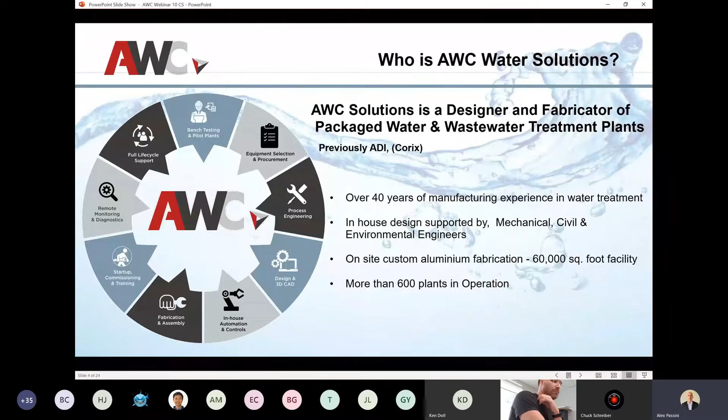For those of you that are new with us or that don't know who we are, AWC Water Solutions, we are a water treatment company. We design and manufacture or supply water treatment plants worldwide. We've been around now for 40 years. We have more than 600 plants in operation, and we are based in Vancouver, British Columbia, Canada, or Langley, just east of Vancouver. This is our shop.

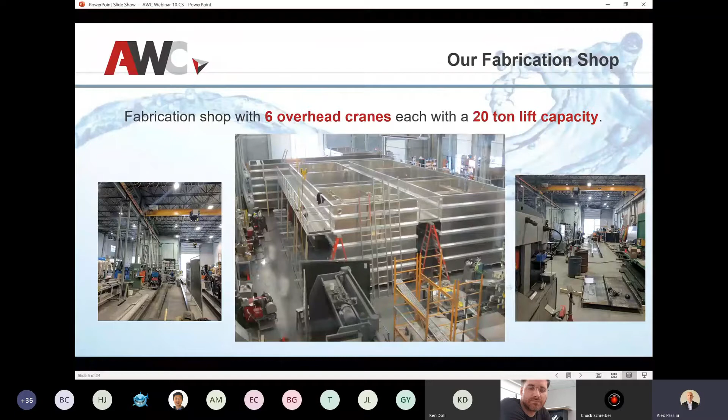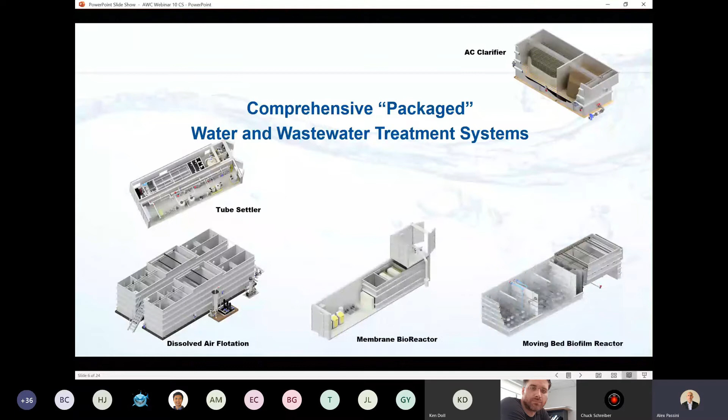This is what we do. It's really fun, we get to manufacture everything in-house and test everything before it ships. And with that, one more slide here - we divide everything into potable, wastewater, and skid-mounted plants. So this is kind of the technology that we go after.

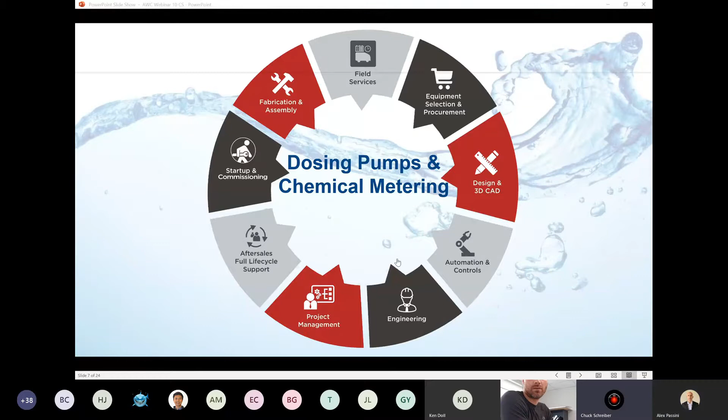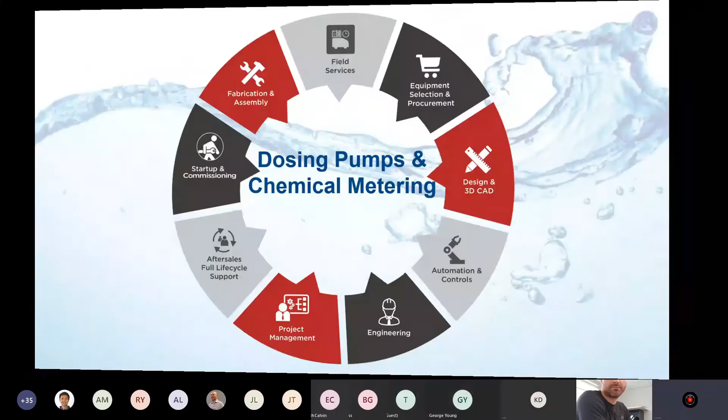Just give me a second while I get this webinar up and going here, guys. Let me know if you can see that now. Yes, we can. Okay, you bet.

So good morning, thank you everybody for joining. There's nothing more exciting than talking about metering pumps. It's a pretty bland subject, I got to admit. Out of all the lunch and learns that I perform and all the conversations I have with operators and engineers and generally end users, it's kind of a tough slog to get through.

So I'm going to blast through this really quick. I'm not going to go deep into theory or into things that I feel are kind of just fillers. We're going to talk about this at a macro level. I'm going to show you all the more common types of metering pumps that are out there. I'm going to comment on what my experience has been on some of the general features and the benefits of those features in those applications. I'm going to talk about the drawbacks, and we're going to talk very candidly about why we wouldn't use one in some applications and why we would use another in others.

More importantly, I'm going to focus a little bit on supporting components, because metering pumps by themselves won't meter properly without the right components - and yes, I'm going to say that out loud. Right now, if some of you are already distributors of other metering pump manufacturers, we can argue that offline, but yeah, we're going to get into that. And then I'm going to identify some of the North American common manufacturers out there in the marketplace.

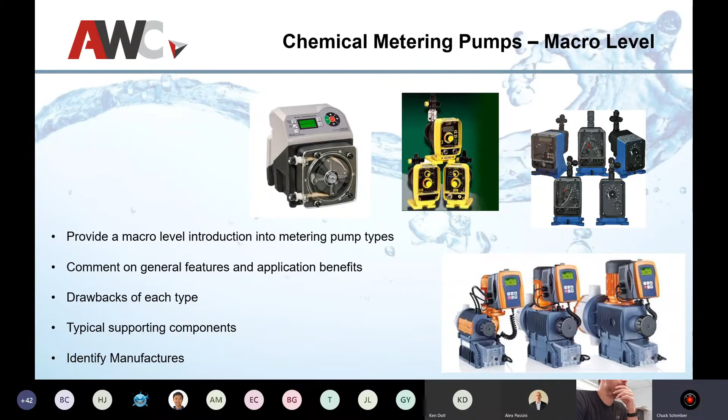Getting right into it, most metering pumps are positive displacement. And obviously, being positive displacement gives us the ability to know accurately how much chemical or product you're pumping in per stroke. That's obviously important when we're dosing hypochlorite, adding ammonia, all sorts of chemicals that we do in the water and wastewater industry.

One of the more common ones out there is a diaphragm pump, which is just a simple diaphragm actuated by some form of mechanical shaft, moving back and forth with a known displacement. The most common one in the industry is the solenoid operated diaphragm pump, which basically energizes and de-energizes a solenoid based on either manual or automatic control.

These guys are low cost. You'll find them in multiple applications - I've seen them in polymer, hypo, ammonia, peracetic acid, all sorts of configurations. They're easy to use, they basically have one big fat dial.

So obviously you turn it one way and you get more, and turn it the other, ranging from half a liter an hour up to 75 liters an hour. So we cover quite a huge breadth of capacity, and pressure is really not an issue for them on the high side. We can also get them in multiple diaphragm heads, meaning that if we have a flow and pressure issue, we can provide multiple diaphragms to increase the capacities.

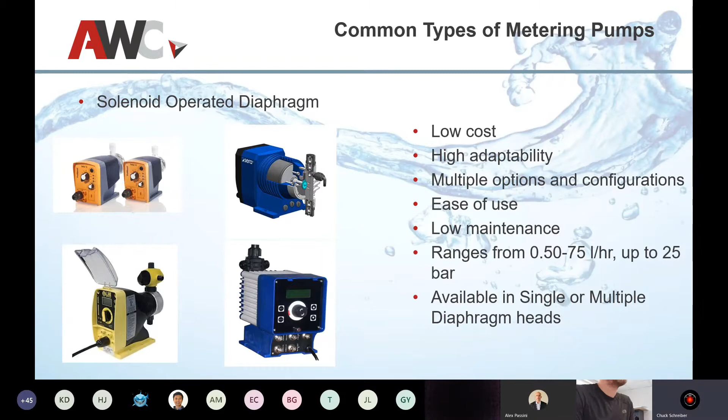In the diaphragm range, there's also something known as a stepper motor. So now we go away from the solenoid and we actually move a microprocessor controlled motor, where we can control the speed and the position of that diaphragm more accurately. The advantage of a stepper motor is we get a longer life than a solenoid. We can also control the suction stroke speed and the discharge stroke speed. So instead of just hammering away, we're getting a slow discharge like a needle or a syringe action, and a fast suction. We can also control some of the pulsation, and obviously the ranges are really the same as the solenoid, around half a gallon to 75 gallons an hour at about 25 bar.

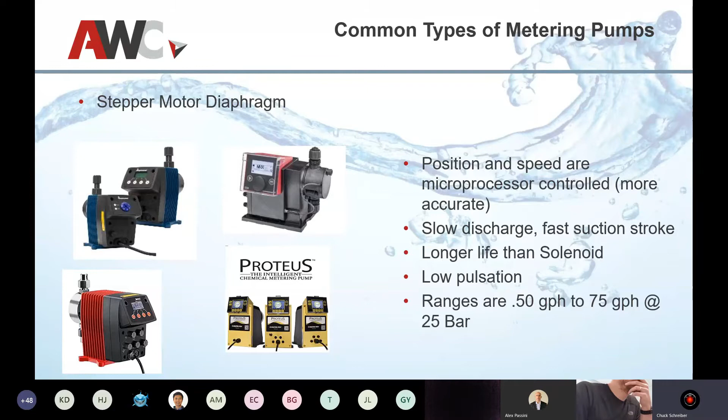Going into the bigger flow rates, typically you'll see these guys on, let's say, on-site generation for hypo, where we're looking at really higher flow rates, maybe higher injection pressures. You're going to see a mechanically actuated diaphragm pump. So we go away from a stepper motor, we don't have a solenoid, and what we really have is a gearbox and a gear reducer in here, and it actually mechanically actuates the diaphragm back and forth.

The reason why we go to this is we can actually provide better gear ratio and tighter control. And these guys will, in terms of maintenance, last considerably longer than you would find out of a solenoid operated diaphragm - maybe slightly longer than a stepper, obviously because we have less load on the motor. Flow rates are up to 10,000 gallons per hour and more. Obviously, you can see some pump companies can go up to 56,000 psi. They cost more, but it's because of the additional components required, being the gearbox. We can typically get a higher viscosity ratings, 300,000 SSU.

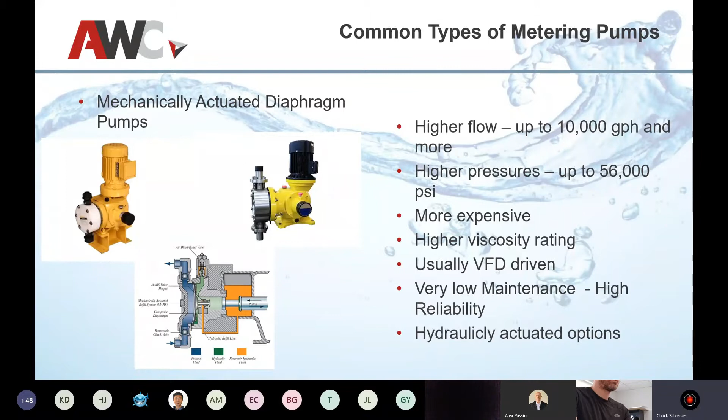And what's really more common in the water and wastewater treatment is the hydraulically actuated version of this. So why that's important is we actually use a plunger that imparts displacement to a hydraulic fluid, which actuates the diaphragm. And why that's important is now we have even pressure on the backside of the diaphragm through that fluid pressure, and those diaphragm lives are very long. Obviously, pressure is a component of that, but I've seen hydraulically actuated diaphragm pumps in operation for 10, 15 years that they haven't done a diaphragm change.

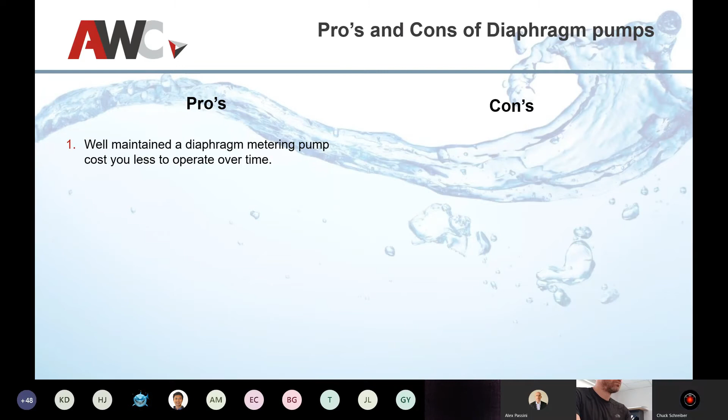So some of the pros - I just want to stop about the diaphragm pumps because there's always a big debate in the industry between two major technologies, that being diaphragm pumps and peristaltic. So I want to talk about the pros and cons of each after I go through them. A well-maintained diaphragm metering pump will cost you less to operate over time if it's well-maintained.

They actually are more energy efficient because we don't need full power all the time - it's only on the discharge stroke. And higher pressures, they have no issues with higher pressures. There's less danger of leakage, and that's comparative to, let's say, a Bellows pump, which I'll talk about later, or a Peristaltic Pump, which is coming up on the next slide.

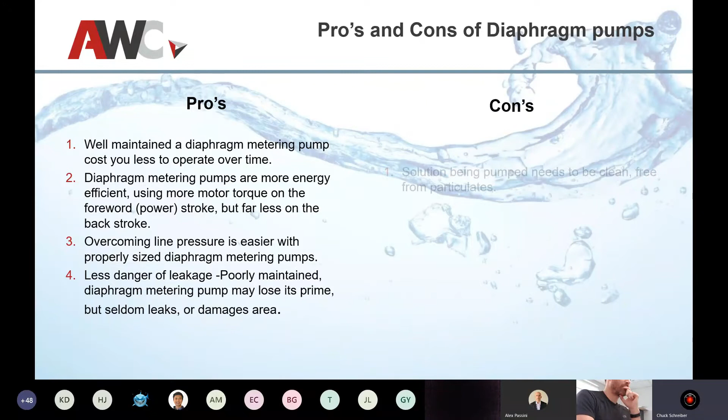The biggest disadvantage is that we need this fluid to be clean. The real reason is because a solenoid pump, a stepper motor pump, a mechanically actuated diaphragm pump uses ball checks for the suction and discharge, and those can foul very easily. That's why it's rare to see them in polymer applications or even soda ash applications or aqueous, because it has a tendency to build up on the seats and balls.

They can't prime themselves when there's a lot of pressure. So a lot of these pumps to prime will have some ancillary way of dumping the discharge line pressure before it can prime.

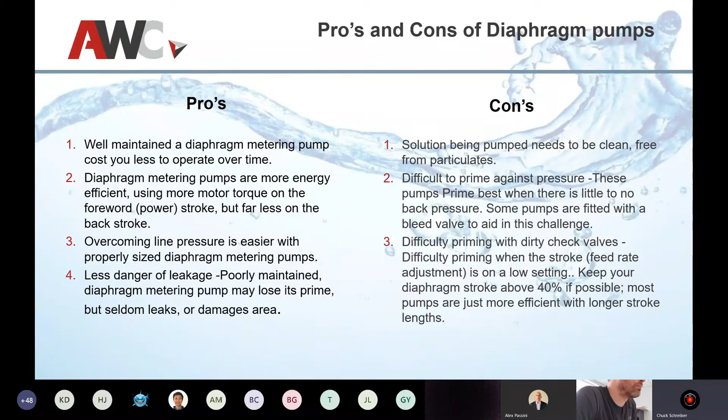The next type, probably very well known to most of this group, is the peristaltic pump. They can come at some of the lowest initial costs. Really simple to operate, really quite easy to maintain. Most manufacturers have offered a way to change tubing very simply. The view windows provide a quick check, so operators like them because they can have a quick look and see that pump's turning and know it's flowing, no weird noises coming in. Initially designed and fantastic for slurries. A lot of the mining guys, aggregate guys, use these for pumping slurries all day long.

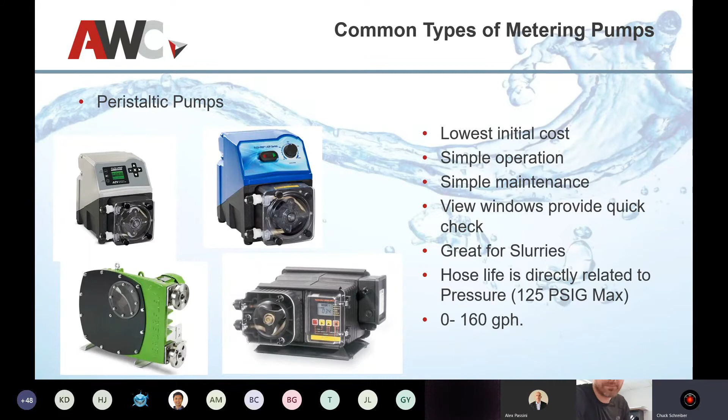A lot of the maintenance is around the hose, and that hose life is directly related to the pressure they're operating against. Full range is roughly 0 to 160 gallons per hour on the peristaltic version. There are what they call hose pumps, just like this Verderflex over here, where they actually use lubricant inside, and those flow rates can go considerably higher, but rarely are they used in a water wastewater application.

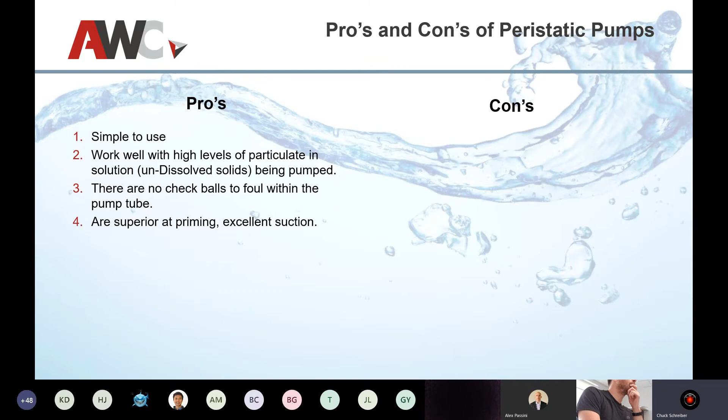Again, looking at the pros, they're simple to use. They work well with solids. There's no check balls, so we can handle a lot of slurries, solutions, and suspensions. Really good at priming, really good.

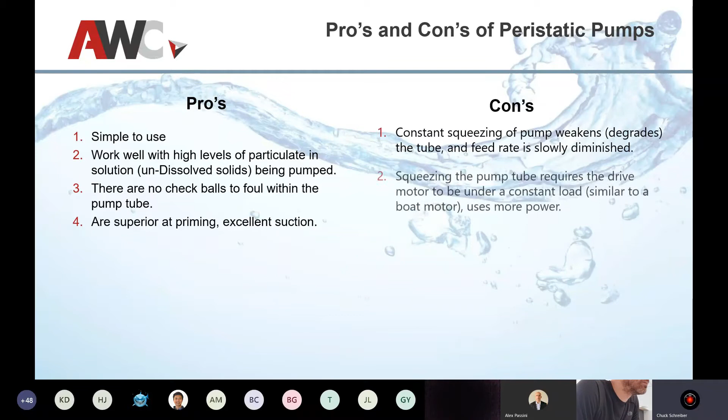That squeezing of the tube, though, weakens that tube eventually, and your feed rate will change. So most operators and people who've commissioned these units know that over time you're always going to be turning the adjustment knob up. So the motor's under constant load.

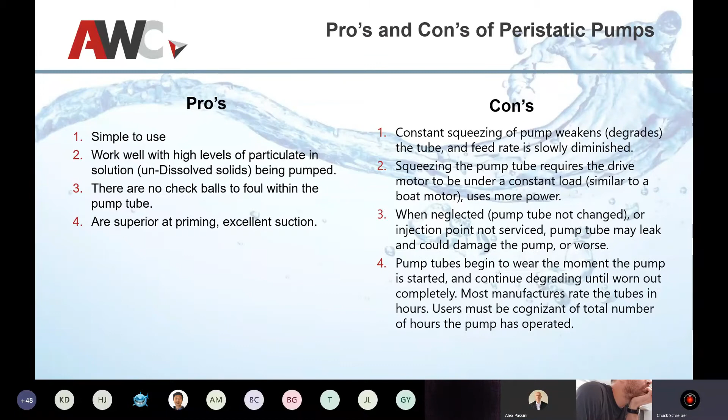And I will tell you, if these pumps aren't changed out in a proactive or preventative maintenance way, they leak, and when they leak, it's not fun to change. So you've got to be up on the maintenance. And that tube, the minute that roller or shoe starts turning against it, it starts wearing it. So you always want to keep an eye on the number of hours that pump's been actually in operation.

Another really common type out there is the progressive cavity metering pump. Some people don't even know you can use a progressive cavity pump as a metering pump, but absolutely, without fail, you can. There are some major advantages: obviously low pulsation, we can handle thick and abrasive fluids. For polymer especially, we have low shear on the fluid, which is very important. We don't have any valves to foul or wreck.

Normally for the turndowns people want on metering pumps, they're VFD driven. Most manufacturers have integral VFDs with the full-on suite of analog inputs and controls. Range is up to 528 gallons an hour at 700 psi, so they're not afraid of much of anything. Their biggest disadvantage, though, is that they can't run dry, and when I say can't run dry, I mean not for seconds.

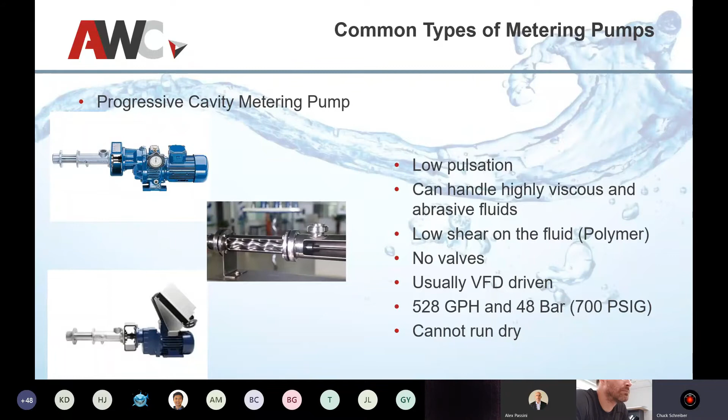Most of the applications here are also metal, so we're not using plastics anymore to manufacture these pumps, or I shouldn't say we, but the manufacturers aren't. They're usually using things like Hastelloy, alloy 20, titanium. So these things are actually built to quite tight tolerance, and they usually last forever. There are some debates, but in general, you don't want to run these guys dry at all, and they do provide a nice pulseless flow.

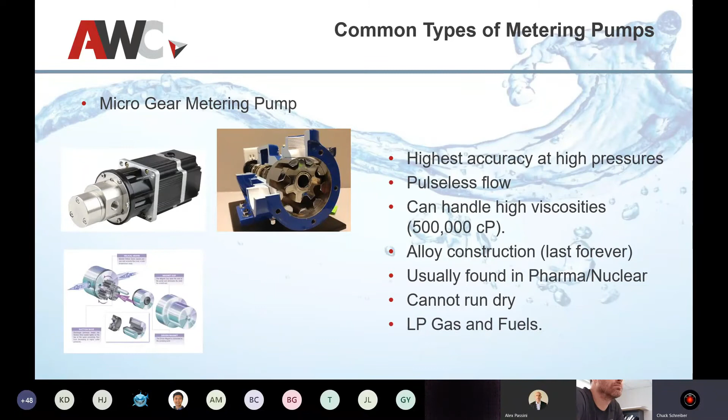Here's one a few people might even raise their eyebrows to, that gets forgotten quite often but is used with quite a lot of success: a simple Venturi with a needle valve. If you have a system with motive flow, or a main line with up to 80 psi, you can accurately meter from a tank that's at atmospheric pressure with a needle valve and a Venturi right into it. There's no moving parts—obviously a Venturi is one machine component—and there's no power required.

And if you're looking for that 1 to 2% repeatable accuracy, we can couple it with a V-notch. A V-notch is basically a known area, so when we know the cross section and area of a V-notch, we can tell you almost exactly how much is crossing that. And if you want it down to that 1 to 2% accuracy, when you combine a V-notch with a Venturi, you can get just as accurate as a solenoid operated diaphragm pump or most peristaltic pumps.

Where these are great for is dilution panels. So, if you're trying to take 12% hypo and you want to dilute it to 6 or 3%, they're really good for that. Or side stream injection like sulfuric acid for pH control. A lot of people forget that these things exist.

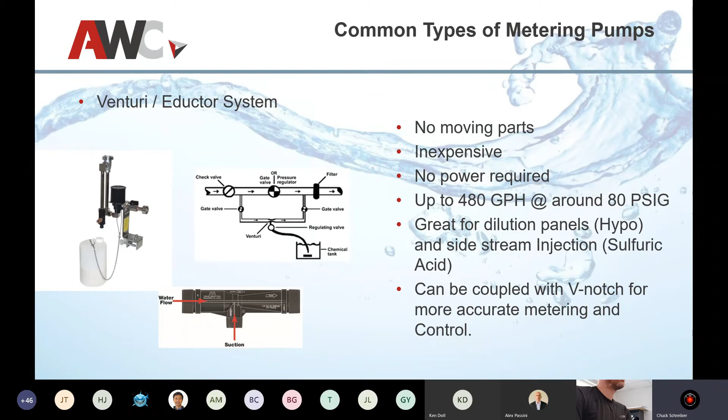Now, this next one is the plunger pump, not to be confused with the mechanically actuated diaphragm pump, because there's no diaphragm here. Basically, it's a piston that's moving in and out of a sleeve.

This is the Mac Daddy of positive displacement pumps for accuracy. It doesn't get any more accurate than this when we look pump to pump. You're looking at about plus or minus 0.5% repeatable accuracy within 10 to 100% of operating range, and I don't think there's anybody else who can really say that, for most brands. What's nice about them is that they are modular in design, so you can add multiple heads, so you can increase your capacity if need be.

You're going to find these optionally, but mostly API 675 compliant, and use in excess of 7,000 psi. So high pressure side boiler feed, low pressure side boiler feed. Lots of options. What we like about these is if you're doing molten liquid injections where you actually have to put a steam jacket around it, that has no effect on the displacement and has no effect on the accuracy.

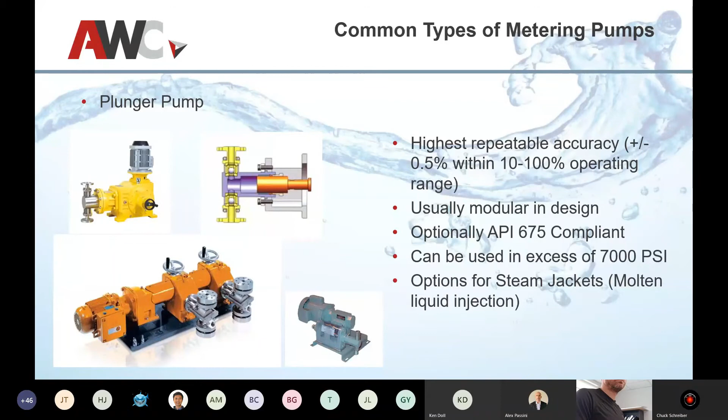This is pretty much the last one in terms of pumps that are out there. The Bellows metering pump, this guy's been around for a long time. It's not too common in the water and wastewater industry, but it certainly has its applications, especially in high purity applications where you're using it in semiconductor manufacturing, film and X-ray equipment manufacturing, where you can't have any ion exchange from even what it's doing.

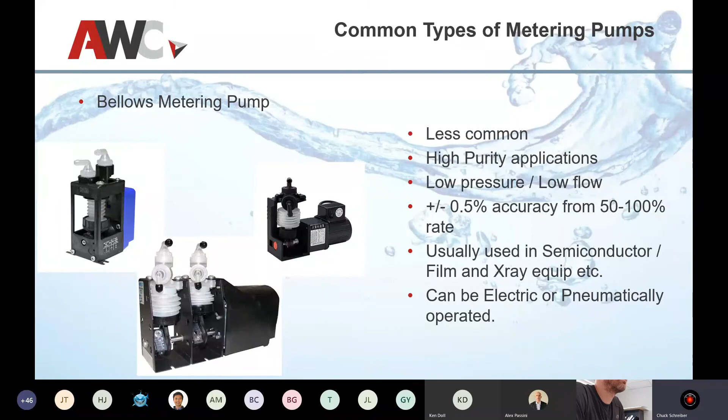These guys can also be electric or pneumatically operated, and they can also multi-stage the head, so we can increase capacity if you need larger flows. I will point out that anything 50% and below of its stated flow rate, the accuracy drops off pretty quick. The other advantage we really like with these is that instead of using an electric motor or a gear motor to drive them, we can actually use pneumatics or nitrogen. So they can be air operated or nitrogen operated, and that's why you see them in X-ray equipment.

So that was sort of the macro level of all the metering pumps that you will run into. There's still probably 10 or more that are extremely rare that you only ever hear of. But I want to put out a caveat to what I've just said: all the pros and cons and features I talked about are generalizations of those specific metering pumps. Each manufacturer out there has special models or features of those models that can offset the problems they've historically had.

So what do I mean by that? An example would be, I said peristaltic pumps have a hard time with tube replacement. Well, Watson Marlow will have a quick change head to take care of that. I may have said degassing or gas entrainment's an issue - most pump companies now have, and have had for a very long time, auto degassing heads to handle off-gassing chemicals. I may have said motor-driven pumps don't have some control suites - you'll see that Prominent will have a built-in VFD with a controller on it.

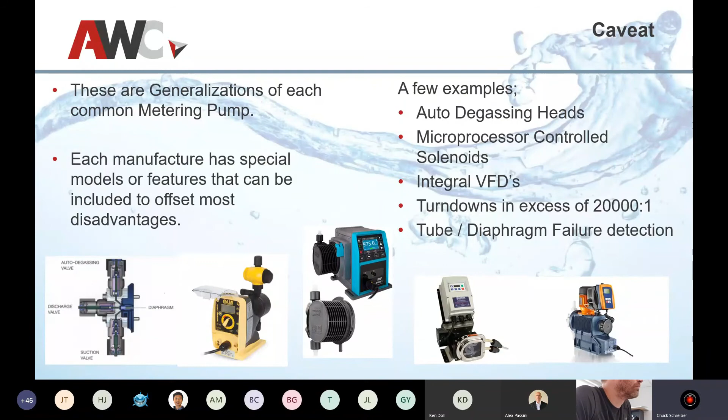So don't take a lot of what I've said as gospel. These are generalizations, and I just want to make sure people understand that. I certainly will get calls from the blue and white guys, and I'll get calls from the Watson Marlow guys and even the Prominent guys about how I've said something here but didn't take into account their special model that takes care of that. So I just wanted to provide some framework.

I'm going to throw it out there, and I'm going to say it. None of these pumps will meter accurately if you do not have the required components for the system to operate as intended.

Specifically, a back pressure valve. Now the peristaltic pump guys will tell you we don't need a back pressure valve, and they're right. For the pump to operate, you don't need one, but you also need a back pressure valve to stop it.

There's a siphoning effect that's happening. You're obviously going to need a foot valve or strainer if you're doing a suction lift application. You're going to want a calibration column, and you possibly need pulsation dampeners. That's a system question.

I'll put out there that when it comes to the injection point, everybody should consider and understand how retractable injection quills work. To me, this is a necessary requirement, and it's not optional. And then obviously a pressure gauge with isolator.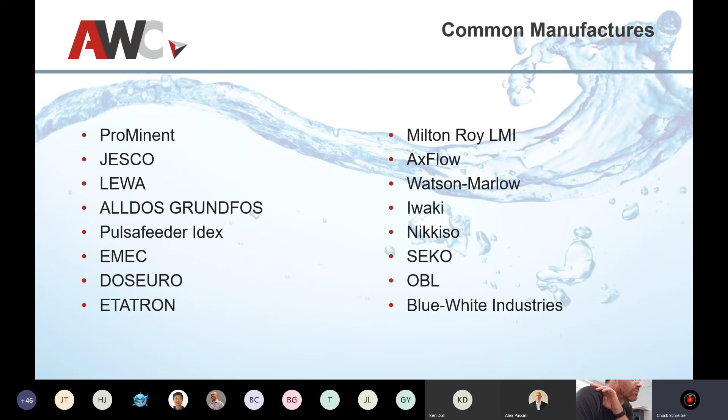That's it, we're done. That was a real high level, guys. Thank you, Chuck. We'll open it up to any questions.

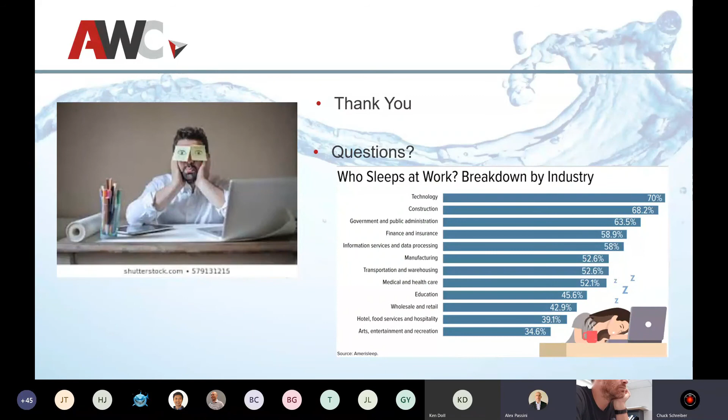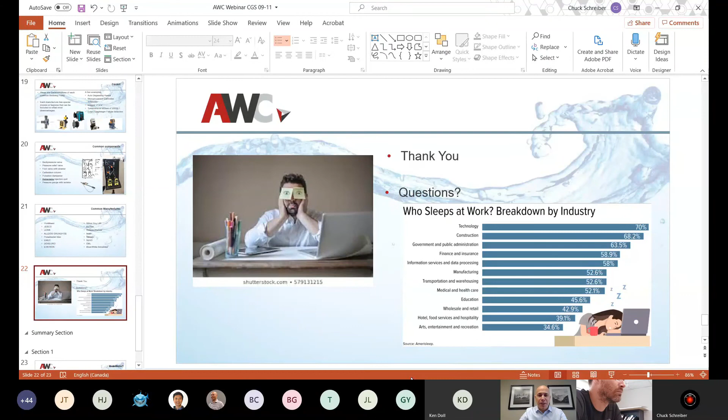I really like how you have that little slide in there of who sleeps at work. I know you'll see that the technology and construction is pretty high up there. I'm actually surprised construction is who sleeps at work, but that's scary. So what I'm going to do is bring this over to me, make sure I'm sharing my screen.